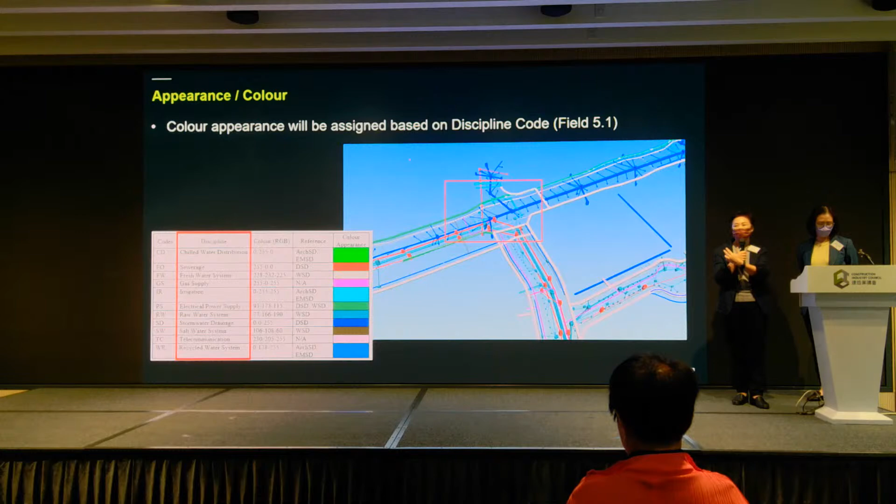However, for the underground utilities, of course we also need to take care of them, because they are also an important asset for Hong Kong. Because each works department has their main color for their coordination work, this is the cross-department color that will automatically be built into our BIM data repository.

Apart from the BIM models, we also need to control the quality of the models. What should be controlled is the object. Once the object is controlled with consistent naming, we can also keep the quality of the models consistent. As I just said, about the LOIN, the ISO information, we also align with the existing CIC geometry requirements and information requirements. And we have some common attributes across the works departments, so that we have the basic data to be shared.

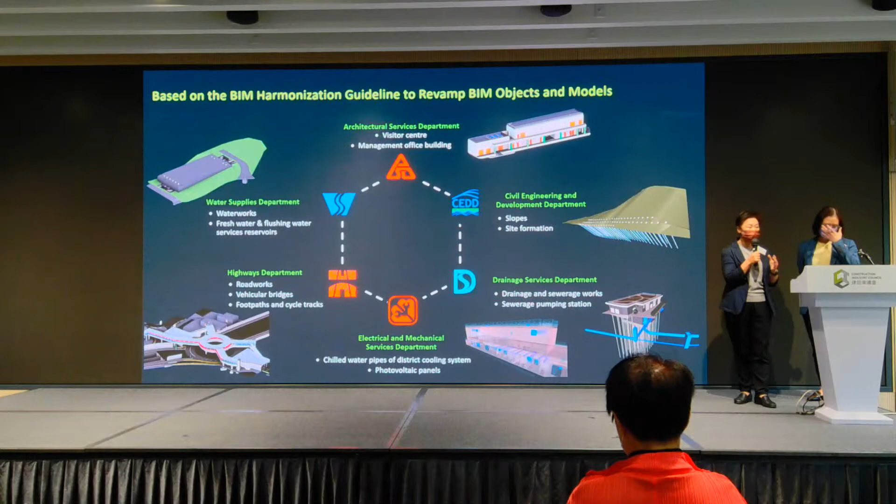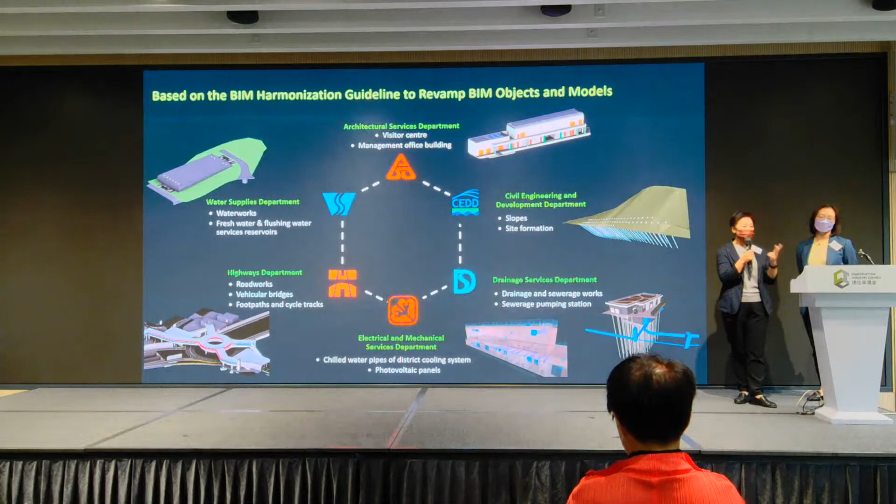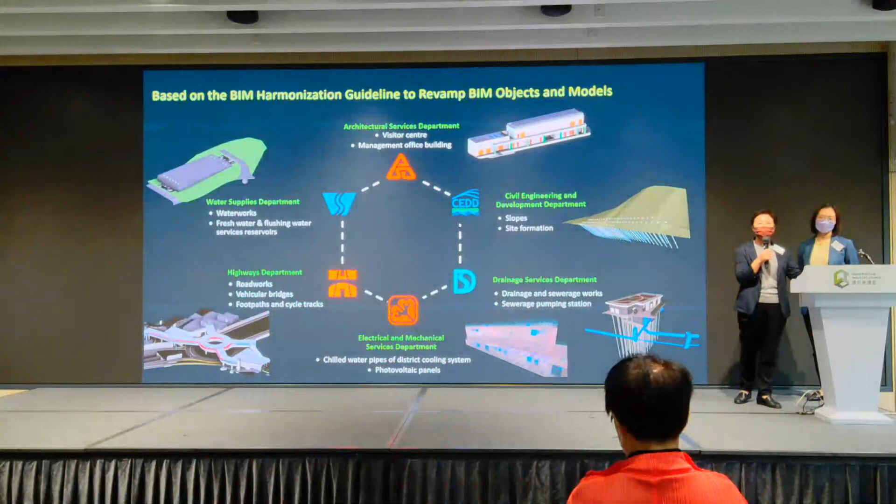Now, I would like to share how the models look. In this project, we have several contracts, and as Carolina just said, the projects span all the works departments, like the pumping station, water supply, highways and buildings, and the BS as well. So in the future, we can exchange our information efficiently within the works departments and lands departments.

Maybe some of you will ask, okay, today is about open data, so what happened to the open data? It's about conversion engines. We developed open format conversion engines. We can't purely rely on the software to convert to IFC with a single click, because the models themselves also have their attributes, and each works department has different requirements for the data mapping. So we developed our customized IFC files, and based on the IFC, we convert to CityGML, and the success rate goes up.

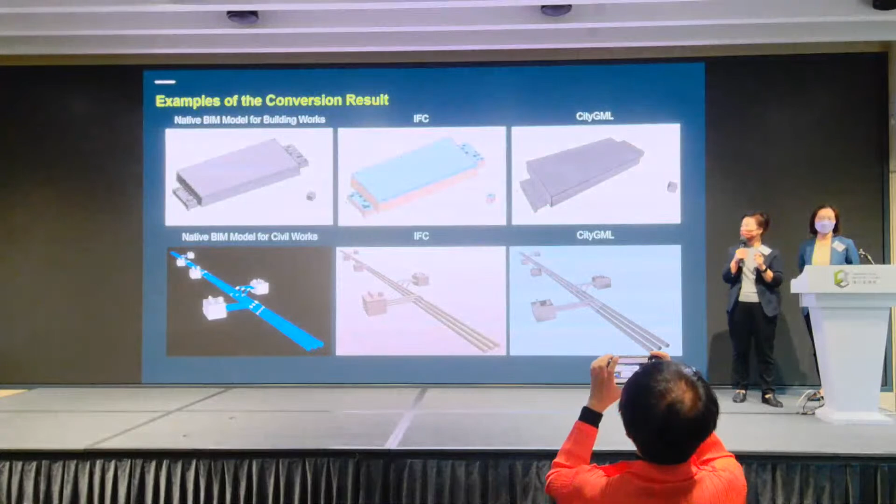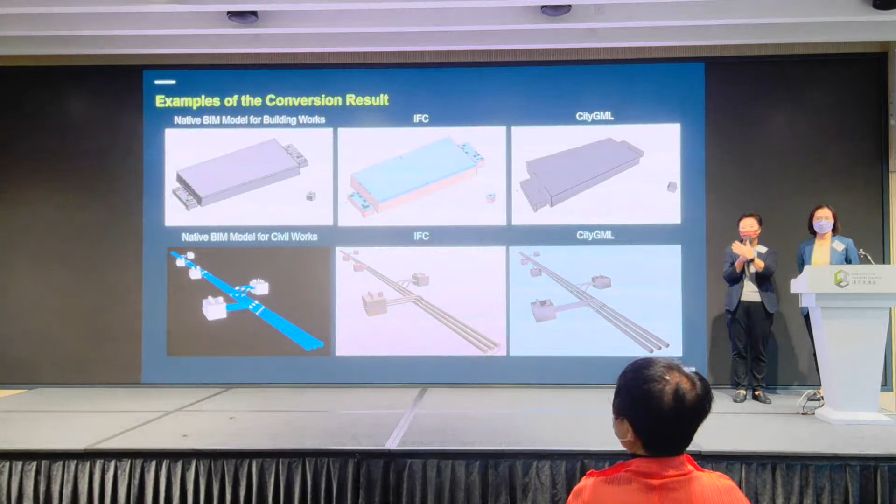You can see some examples here. We have the native models here. We also have some IFC and CityGML examples. Basically, the geometry is okay. Of course, it's not as detailed as the original native files, but I think it successfully supports the open format.

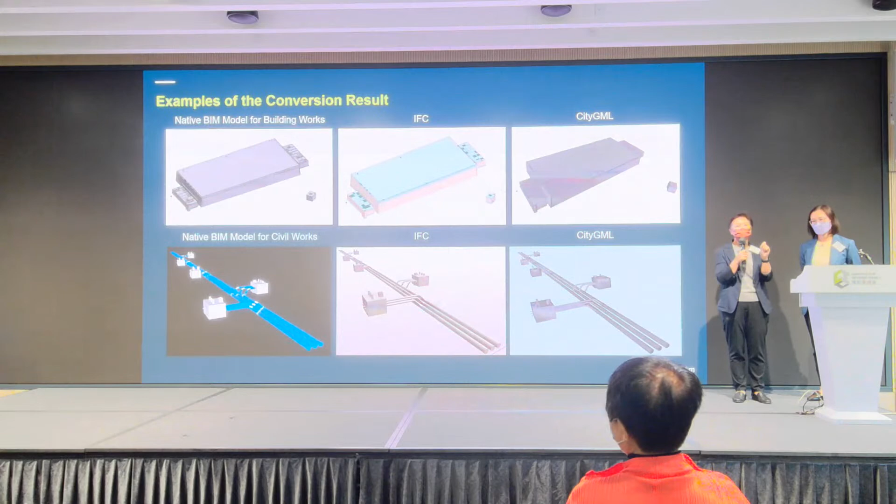How about the data inside the models? Here is an example of the converted IFC, with some of our customized attributes converted as well, and the CityGML. Of course, we understand that the data sets of IFC and CityGML are not the same. So in our conversion engine, we still need to do some data mapping between the different formats.

We just mentioned we need a secure place to store our BIM models and information. Recently we established the BIM data repository on the government cloud infrastructure, we store the models, and we let the departments test it. We have some integrated functions like a dashboard summary, 2D map, 3D visualization platform, and some conversion engines inside. Generally, we have an overview map.

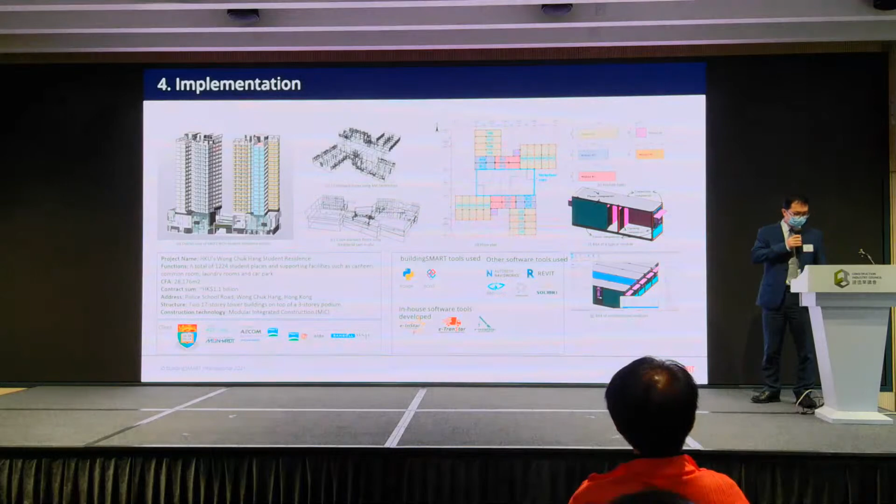The pilot project was the Hong Kong student residence. It's an iconic MiC project because every MiC module is actually an asset. So we wish to track the changes and track the real-time status using this OBE system. So here are some screenshots. So for this component marked in yellow, we can actually select the different status.

And here is also another innovation: for every uploaded real-time photo, we do not put the photo directly onto the blockchain, and we don't just add the hash code to the blockchain either. What we did is we first make a lower resolution thumbnail snapshot, and we can compress the 10 megabyte photo down to 100 kilobytes. And we store the thumbnail in the blockchain together with our IFC changes.

So after weeks, we have updates of the component, updates like installed the furniture, and then start of the delivery, and then, yeah, it's arrived at Hong Kong.

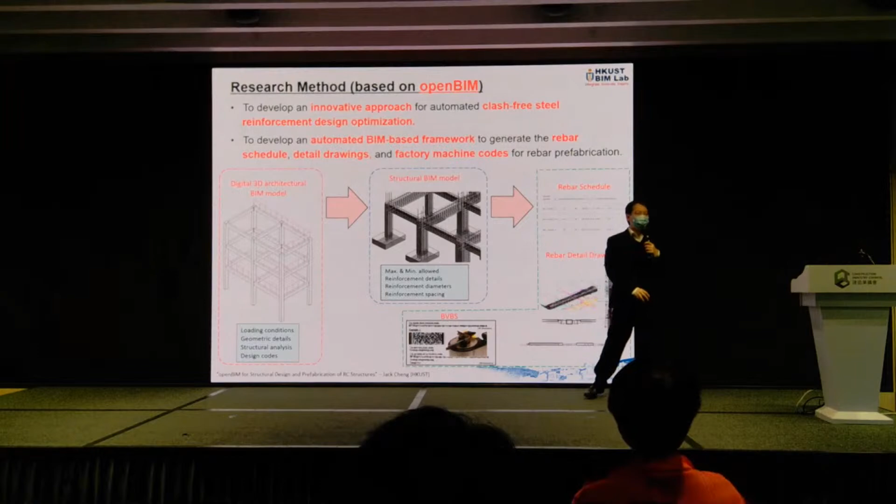Basically, the idea is that given the architectural model, can we get the rebar BIM model, and then with the rebar BIM model, can we get the schedule and the drawing and the machine code, so that hopefully we can bypass the drawing and go directly to fabrication. First, we need to formulate this problem into an optimization problem.

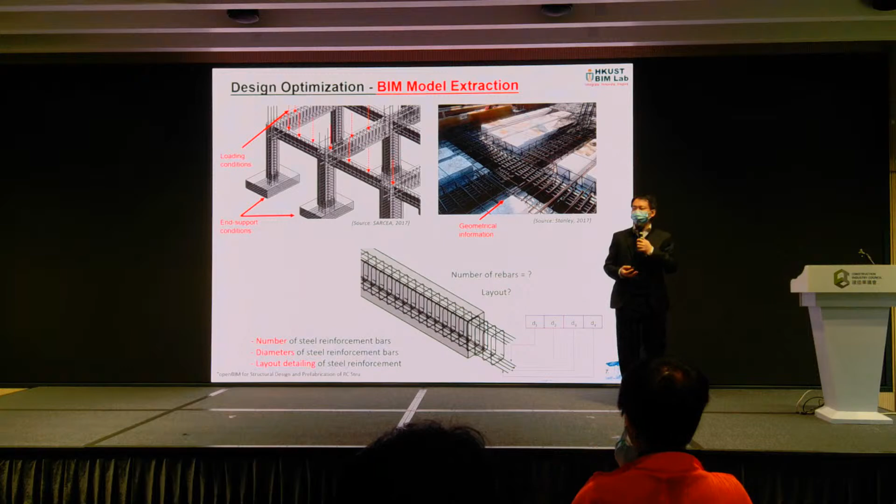For example, for rebar, if you think about a beam, we have the top bar, bottom bar, and stirrups. We can formulate this into an optimization problem, and then try to use something like a genetic algorithm to solve it.

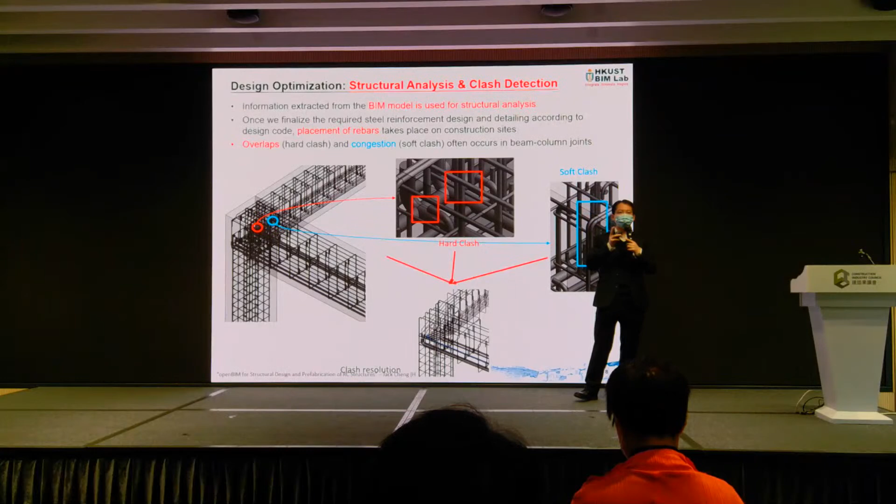We also try to design something with no clash. To do so, we need to consider soft clash and hard clash, and we need to get the geometry of the BIM model. And now we're talking about IFC.

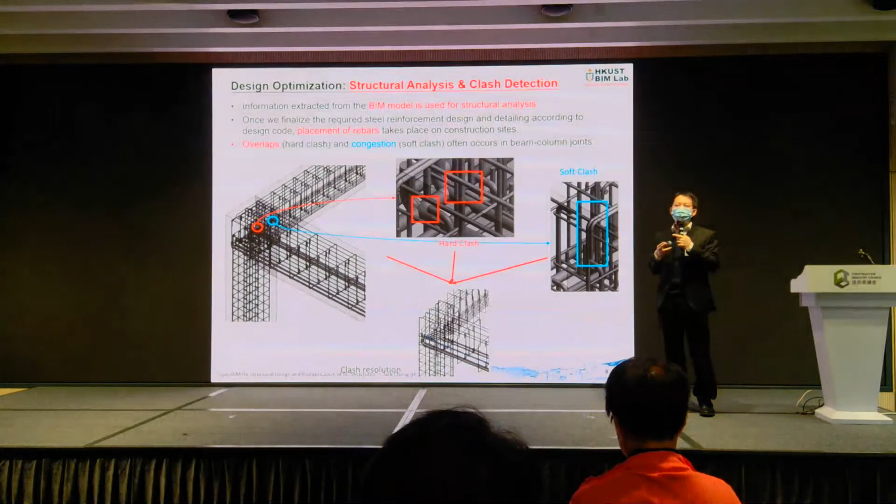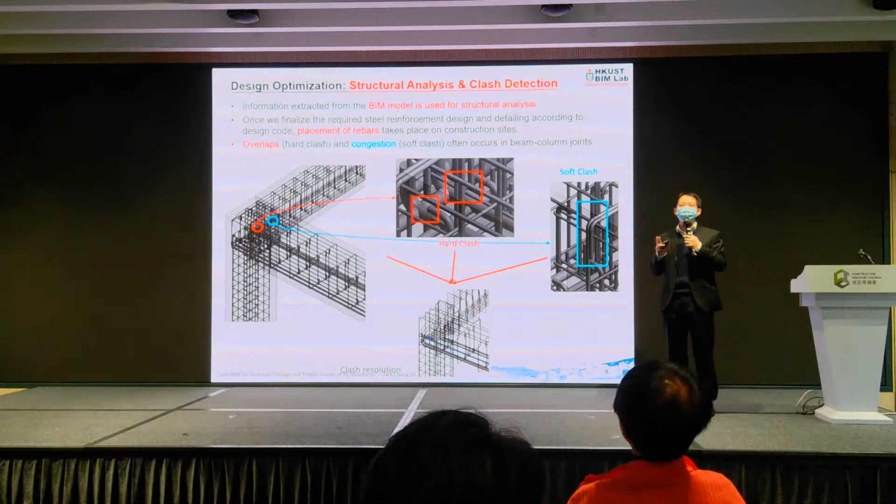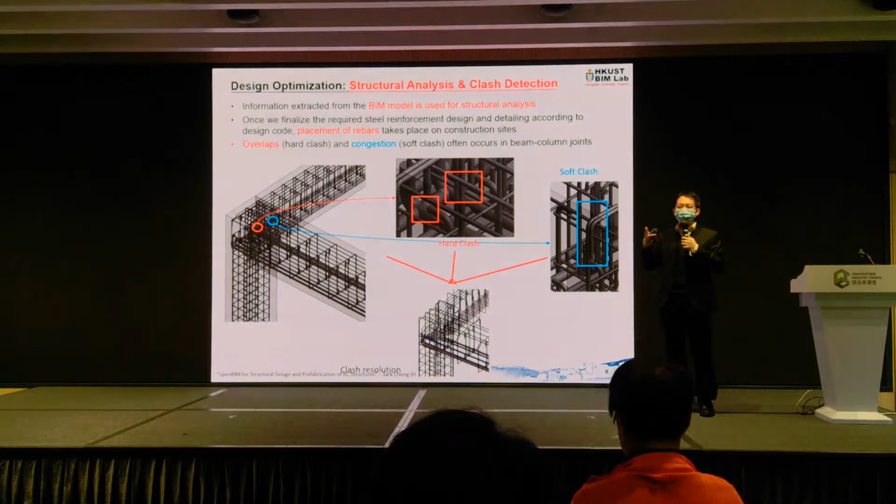In IFC there's a specific way to represent the geometry and the coordinates. We found that, for example, when we get information from IFC, it may differ from what we obtain from Revit in terms of radius. For rebar, do we use a center line, or for example when we calculate the cover, do we use the center line or the outermost side? So we need to understand the data structure and the meaning of the data to get accurate calculations.

We try to use openBIM to support different interoperability, and these are the software we try to support. For example, we use Autodesk Revit to draw the BIM model, but at the same time we support ETABS, a very commonly used structural engineering software, and we also use Robot, with Revit-Robot support being simple, and then we also use SES, which is also software normally used for rebar detailing in Hong Kong.

Okay, and this is why we actually want to promote the use of the openBIM standard. And this is actually the software ecosystem map, which also will be required for the submission in this month's awards submission.

We can see that from the architectural model it's actually IFC, and then we also get the information from Excel so that we can have Excel files storing all the rebar layout, diameters, etc. Then we can use Dynamo and Python to draw, use optimization, and draw the clash-free rebar model.

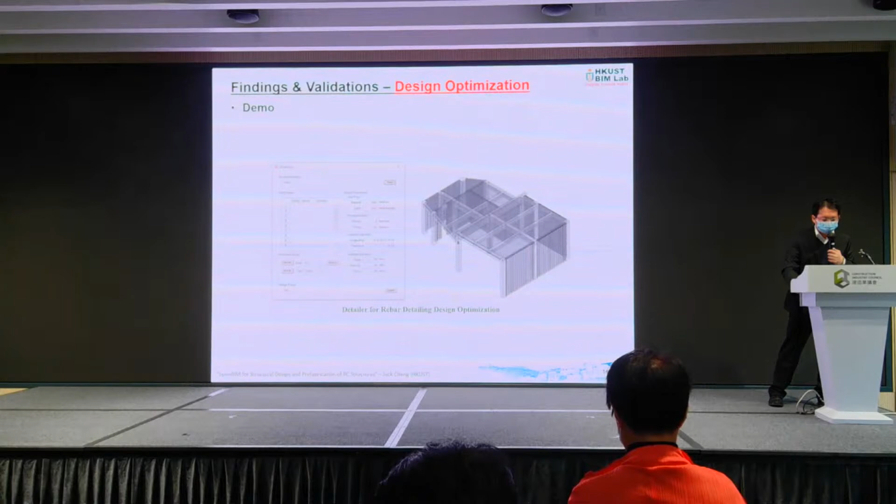It is kind of frozen. Anyway, so this is actually the video to show that we have developed a plugin that extracts information from IFC, the geometry information.

And then we can feed this to a MATLAB code, which tries to calculate the optimized rebar for different locations, the diameter, and then the quantity, and then we can also measure what will be the fixed end or the shape curve, something like that.

And then we can also use this one to export the BVBS. This is the IFC schema, and then run with the IFC rebar model. Then we can export to Dynamo, and then we can have the code of the BVBS.

And then we also need to understand BVBS because BVBS is actually another kind of open standard. Although it's not buildingSMART, this is also a bunch of data which actually captures the geometry of the bending of the rebar, quantity, something like that.

We try to map this data from IFC to all this, and we try to also consider the IFC terminology and see how, as I mentioned, we could extend the IFC terminology so that we can capture the rebar and then export to prefabrication.

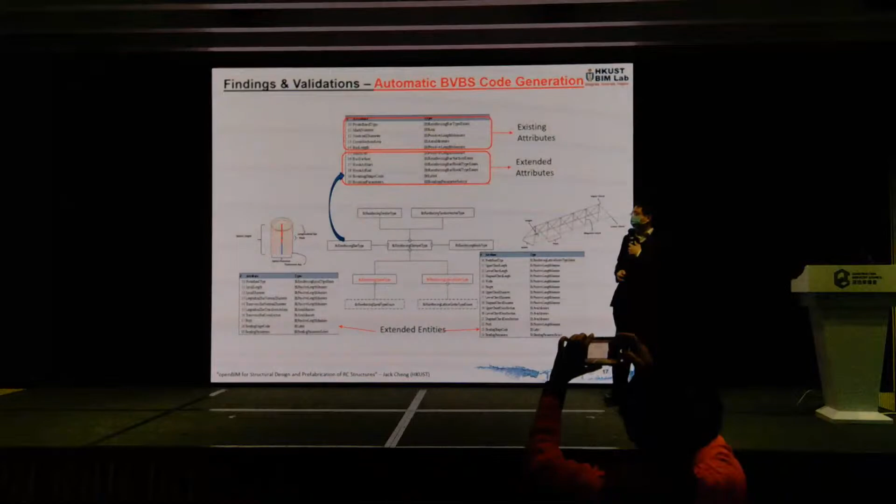And this is some results based on the rebar IFC, the rebar model. Then we can extract this, and when we use the Dynamo code, we can quickly generate BVBS code that can be used for prefabrication. This will be helpful for what we call BIM fabrication or digital fabrication, and this could be one of the considerations.

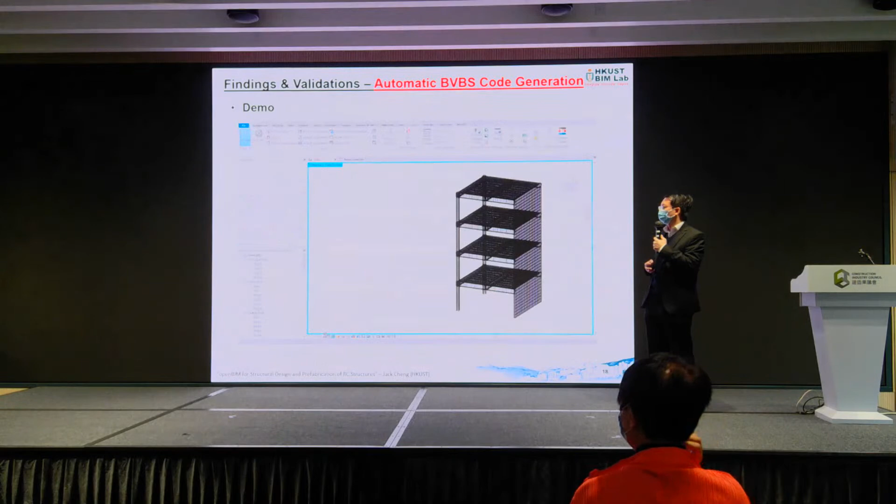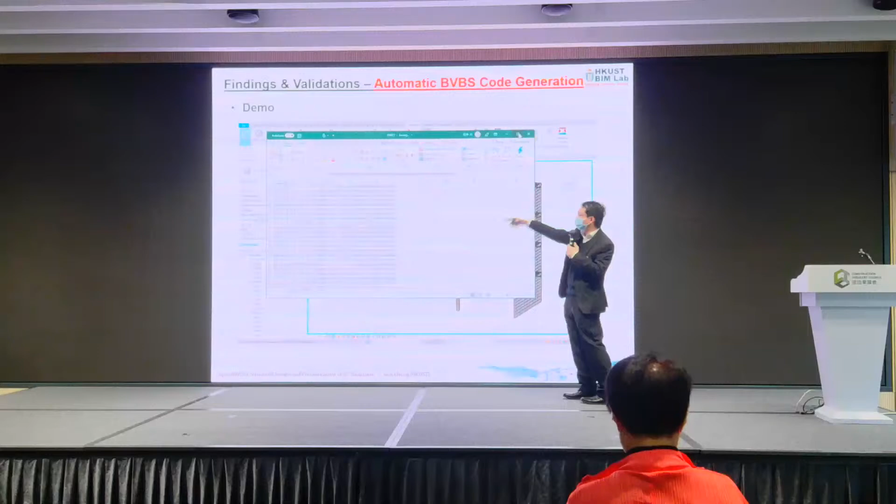And now we're trying to use IFC results. With this, we will generate the Excel file, and this Excel file has all the lines that can be fed to the machine directly for the prefabrication of the rebar. So this is actually what I would like to talk about.

But before I finish, I also want to quickly share with all of us some of the other OpenBIM initiatives that we are working on. One is we try to use OpenBIM for digital twin, OpenBIM for robotics, and OpenBIM for blockchain. So in maybe 3-4 minutes, I would like to share this.

One, maybe you have heard that we are using and we have a digital twin for the entire Hong Kong University campus. What we try to do is import the Revit model, the native model, and also the IFC model onto some platform like ArcGIS, and see whether they behave the same.

I think maybe Canon will have a lot of experience like that. We found that for IFC and Revit, some entities or some attributes have different names that we need to map. If in our GIS model some come from IFC and some come from Revit, we need to do some mapping between them.

Similarly, if we want to consider BIM and GIS, we also find there are some differences between the attribute information, and this is something we need to align. We talk about harmonization - basically these are the attributes that we really need to understand so that we can harmonize the models from different formats imported to the same platform.

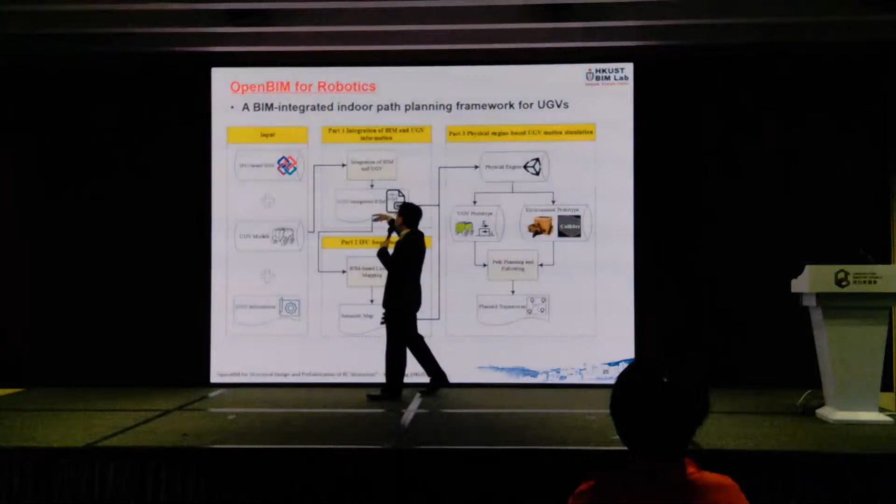With this, we try to get the building information from IFC, extract all these IFC curves, and get the building geometry. With this building geometry, we try to put this as the barrier map, and then we can operate the robot inside.

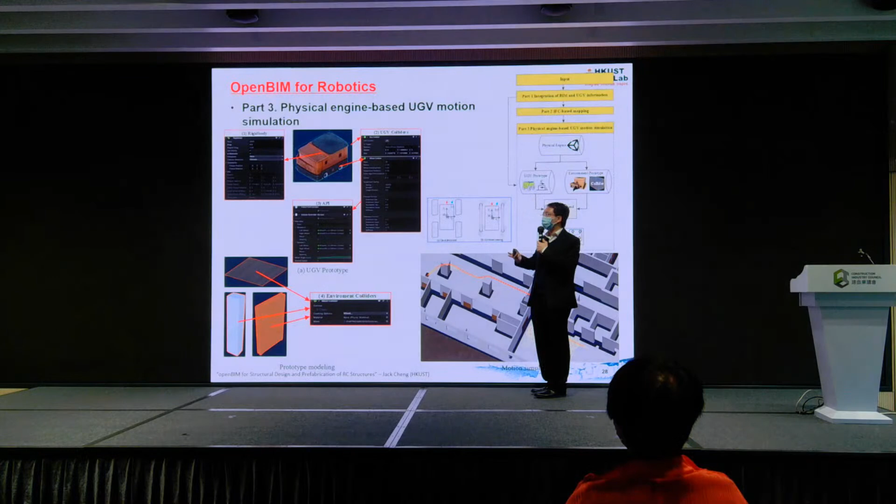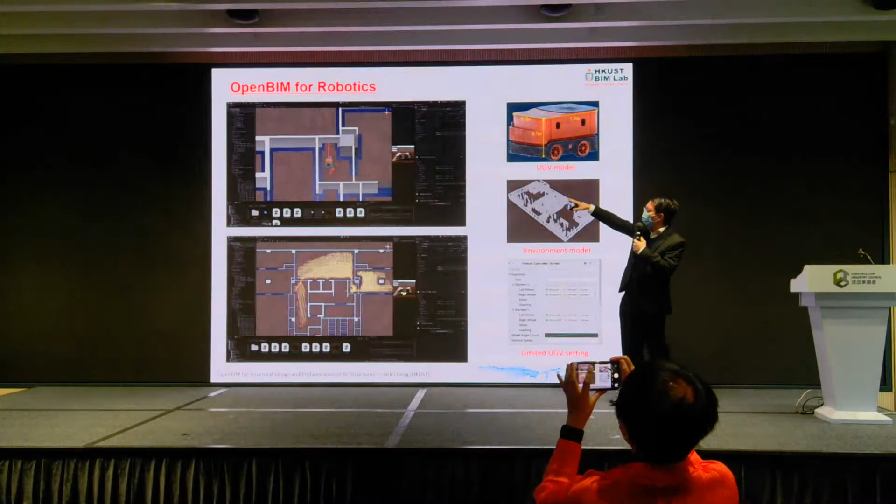With this, we can have something like this. The building geometry, all the walls, actually come from IFC. And with the IFC, we can have the robot model, and then we can see what is the trajectory for the robot to walk inside.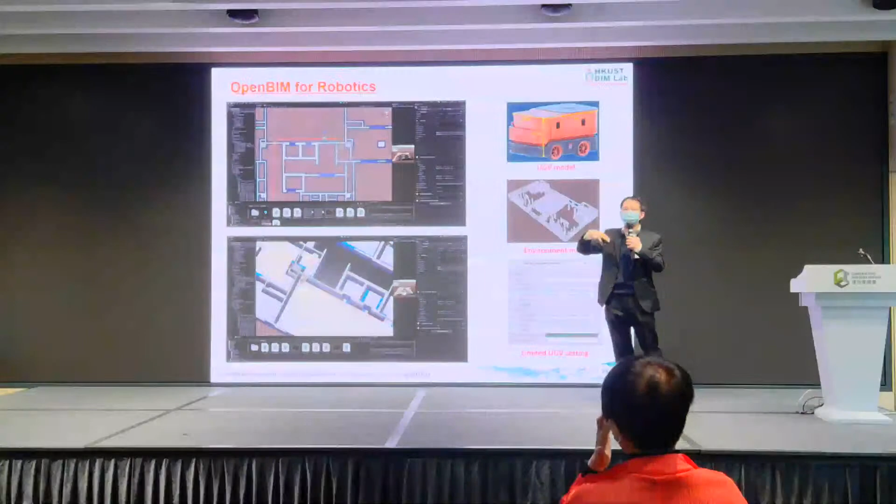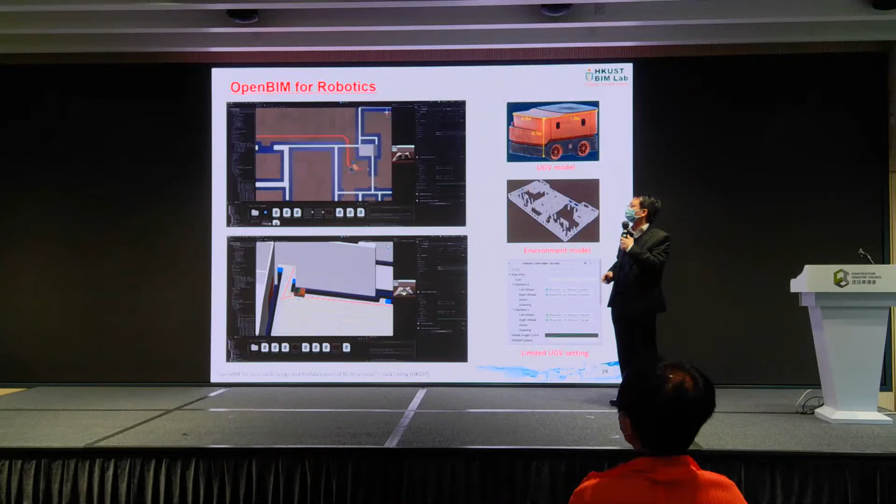The last one I want to share with you is OpenBIM. Professor Fraser has talked about the integration of BIM with blockchain and IFC with blockchain. We also consider the use of IFC applied to CDE, which is also a hot topic. The concept is that in CDE we have work in progress, shared, and archive - something like that - and how we can also use IFC together with blockchain.

You can see that different people may have their own work in progress, but they share the same chain. This chain is only a record, but it does not really have the full document - the full document will be controlled by different people.

With the same chain, no one can argue that someone changed it without notice. Behind this concept is IFC, and we also consider another standard called BCF. Whenever there's a change in the IFC model, we use BCF to store that change, and then BCF gets put on blockchain. This way we have a record of all the changes to the models, and this process is traceable.

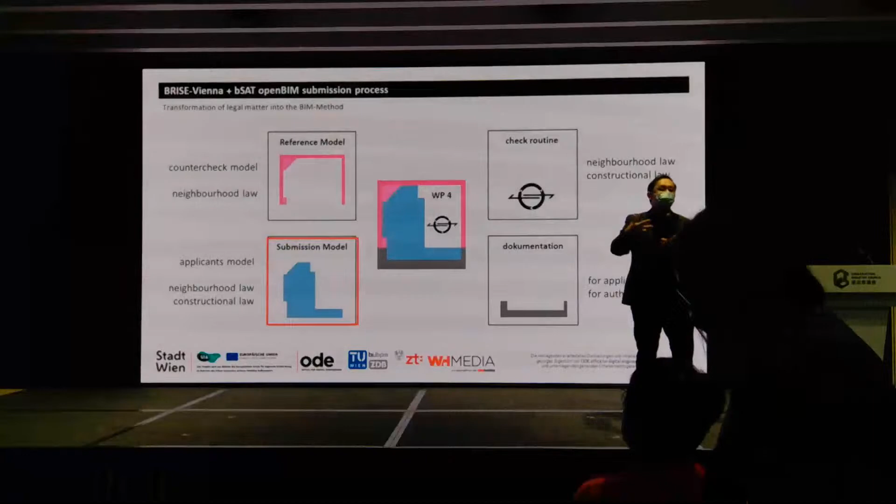What does it mean, the submission model? How is it related to the reference model, the design model? Okay, there are a lot of processes involved. Of course, it's not only from the technical point of view, but the regulatory bodies also need to get involved and discuss. Now, in buildingSMART International, there are governments, people from other countries that get involved in this process and come up with some sort of automated process.

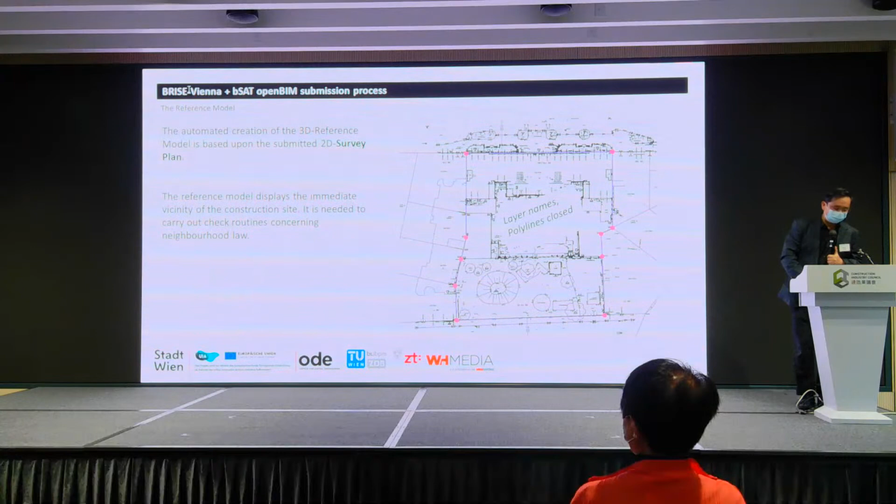You can see the topics. People discuss it, and we have checking rules: automatic check rules, partial automatic check rules, and supporting check rules. Now, it is not conclusive yet, of course, but this is the path in terms of openBIM; people are looking into this area, which is an international collaborative effort to put together an automated process.

Of course, there's just some flash of the studies on the automatic check rules, how to detect these issues according to whether it complies with the laws and regulations, right? Some partial automatic rules and some supporting checks. We define the design model and the submission model, under what sort of format, what sort of requirements are submitted to the government, and all this automatic checking is still going on.

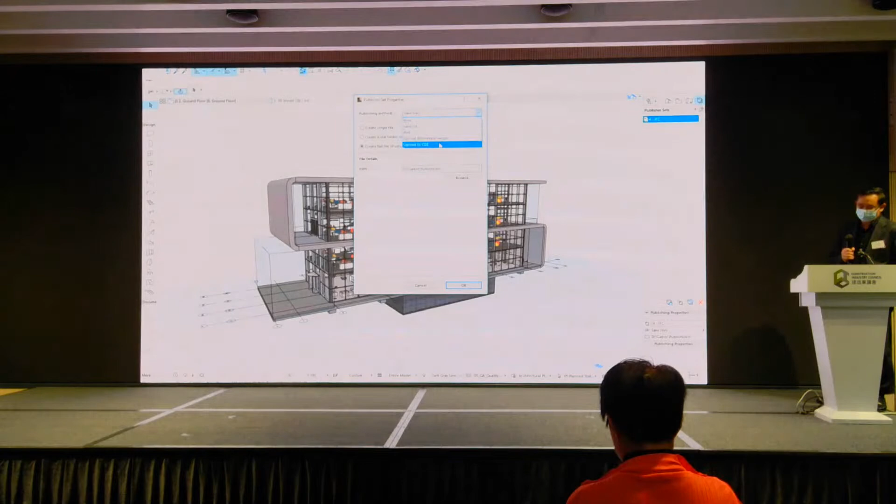Managing models during design coordination can be time-consuming and lead to multiple versions of the truth. Now with the CDE API, you can enable faster processes and reduce cycle times. To start, let's look at the direct connection from the authoring tool to the CDE. In ArchiCAD, a model author is ready to publish an updated version of the model. They can choose to connect to Aconex and log in. Now the model updates can be seamlessly published. With a click of the button, the model is published to Aconex. Inside the CDE, the model version is available to be accessed and viewed on the project.

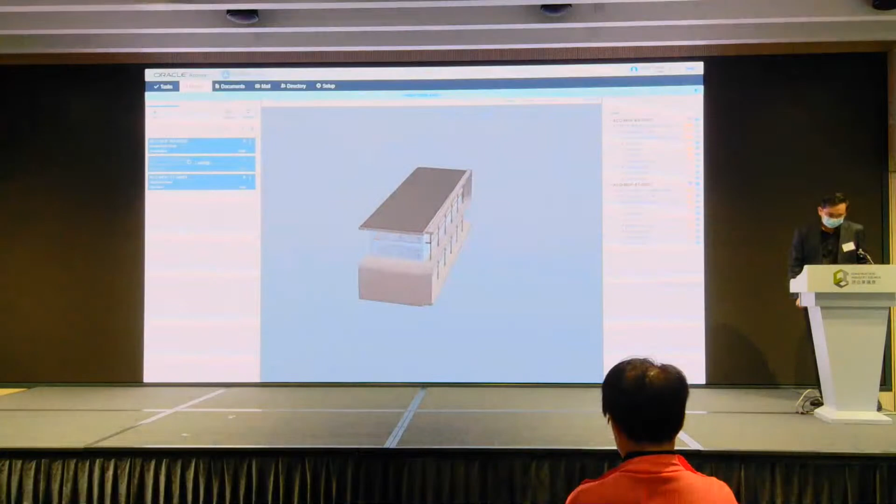With all the model versions ready for coordination, an analysis tool can easily access all the models. In Solibri, the models are downloaded directly from Aconex. The quality checks are then run to automatically validate and identify the results that need to be addressed. For this coordination cycle, the high priority results are raised as BCF issues. Now the BCF issues are raised, these design issues need to be distributed amongst the design team for resolution. From Solibri, the design issues are directly pushed to Aconex, with the correct assignees being notified that they have a task to action. The design issues are now available in the CDE to view, navigate, update, and report on.

So it's a collaboration between three platforms.

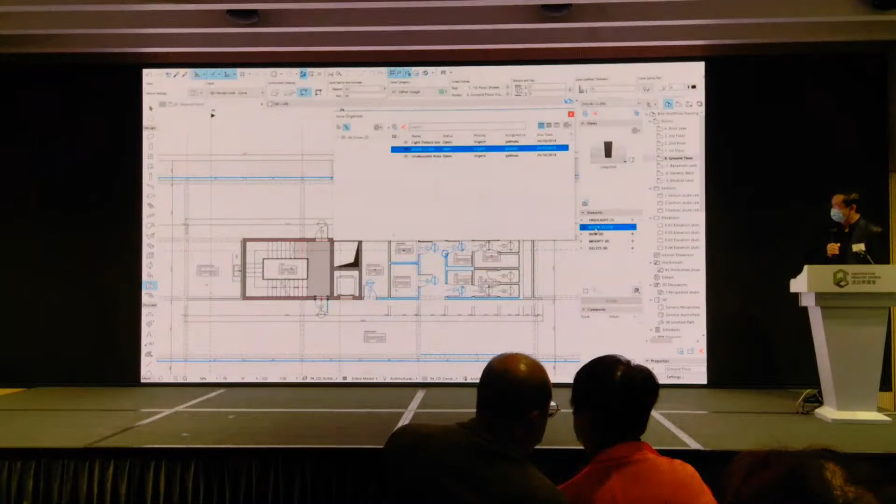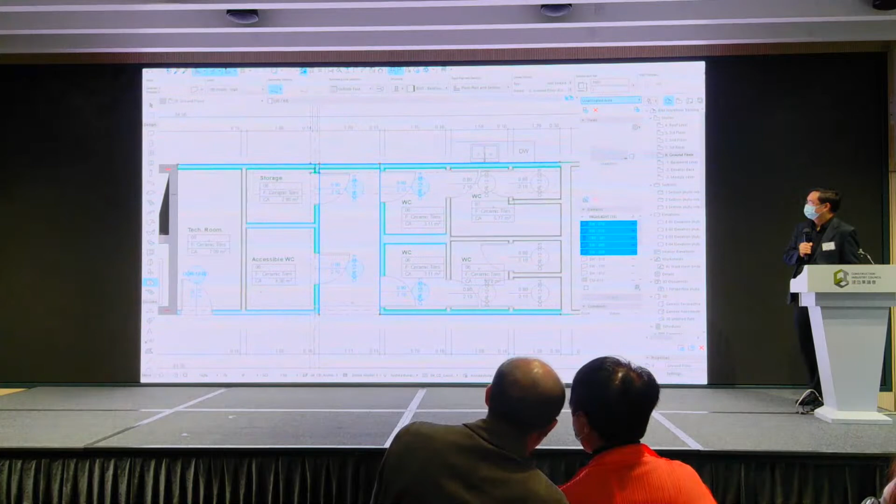Issues are also available and ready to be resolved directly in the authoring tool. In ArchiCAD, the same issues are viewed and the model author can be taken to the exact location with a single click. The design issues are resolved and the issues updated directly within ArchiCAD with any additional comments. At this point, the entire design team is aware of the progress of the coordination.

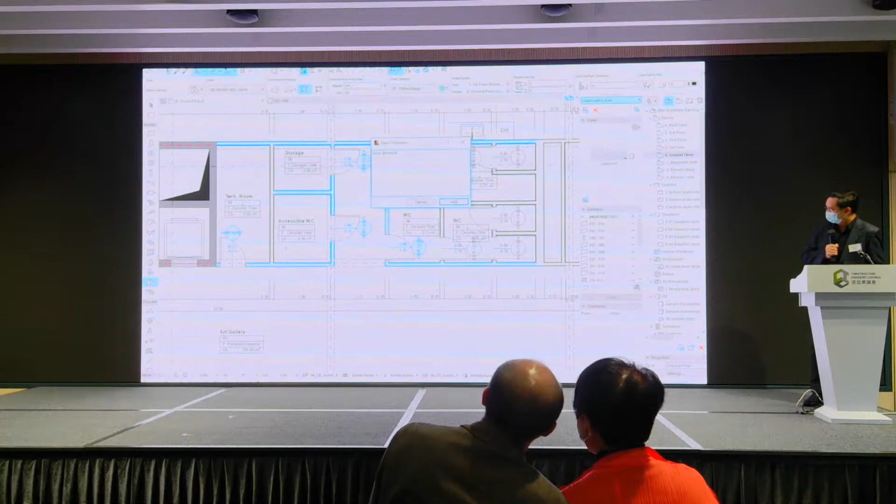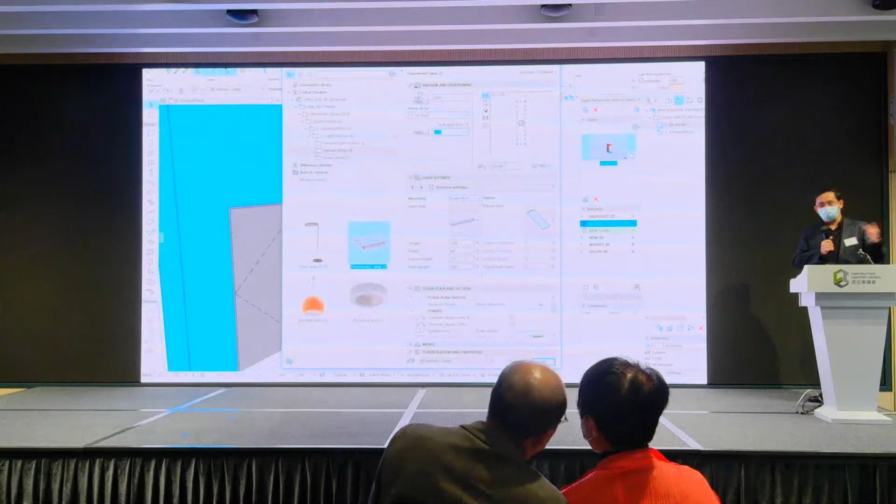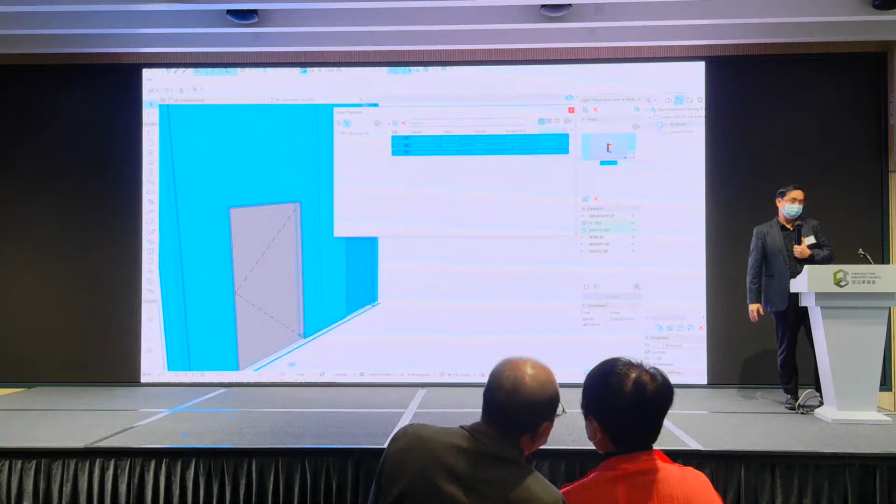So it's a connection between Aconex, ArchiCAD, and Solibri. Okay, using the BCF format that connects all these together, so the same content can appear on different platforms. Right. So okay, without going into further details.

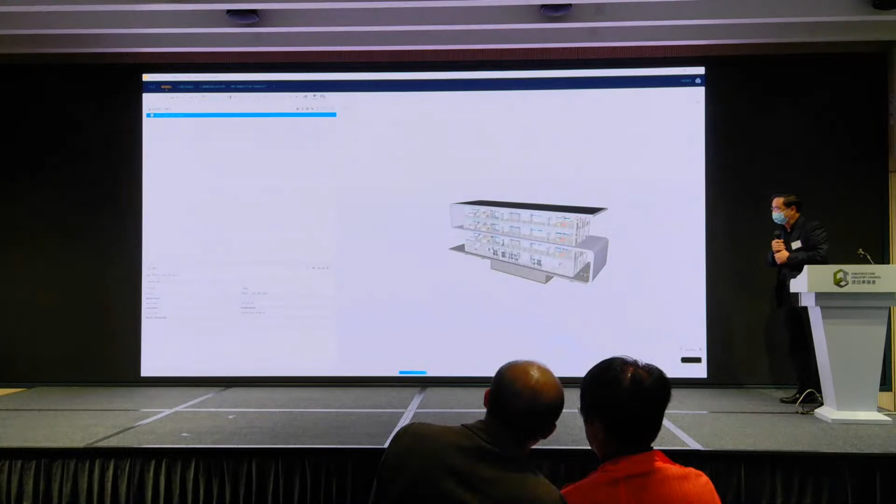To complete the coordination cycle, going back to the design to ensure the checks are now resolved. With the CDE API, projects can seamlessly manage the flow of models during coordination.

All right, now the story will go on. It's just a demonstration; it's not yet commercialized, right? It's still a study, but with the CDE, with the BCF here, you can see that people are interested in breaking through the barrier between different platforms.